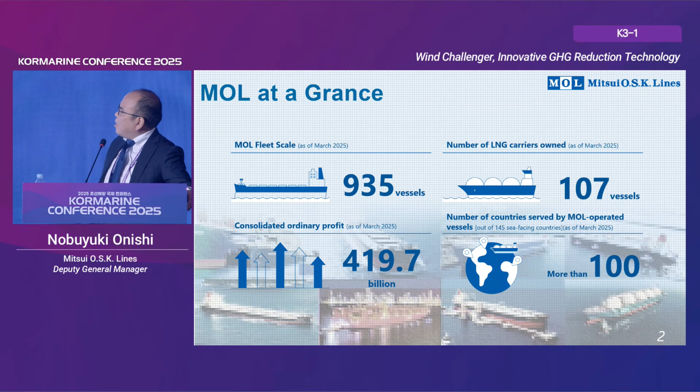Let me briefly explain our company. We are one of the biggest shipping companies in the world. Our fleet size is 935 vessels, including 107 LNG carriers. The LNG carrier fleet is one of the biggest at this moment. Our fleet portfolio is quite well balanced: one-third is bulk carrier, another third is energy sector, and the other third is other transportation sectors. So this is our company's brief explanation.

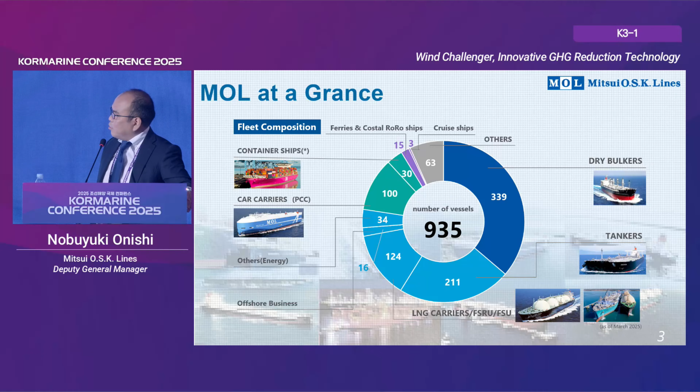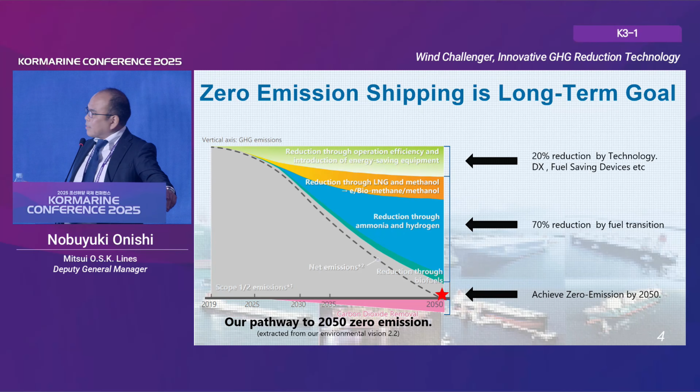Our target is zero emission achieved by 2050, same as almost all other companies. 70% reduction of the GHG will be by fuel transition. The other 20% is by technology, like DX or fuel saving devices, something like that. 20% of energy saving is huge. How should we do it?

The wind in the Korean language is pung. Is it correct pronunciation? Yep. The wind is the best candidate to assist ship propulsion with no emissions. There's the possibility to reduce fuel consumption dramatically. Dramatically meaning the underwater devices are already full capacity, very busy under the water. But above water, there's still a lot of room to improve the ship's efficiency. The wind is the best candidate.

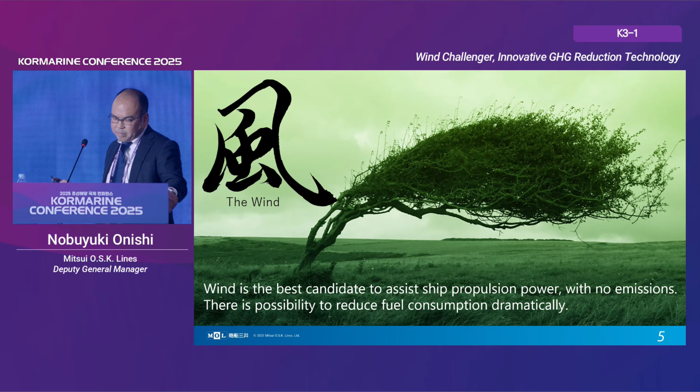We have a very long history getting familiar with the wind. We started the R&D of the Wind Challenger in 2009. We built the test facility in 2013. The first actual system on a vessel was in 2022, three years ago. Last year the second one was delivered. Next year, together with Hanwha Ocean, we will deliver two energy carriers with wind propulsion systems. Then we are going more forward.

The wind propulsion assist system is now a trend of the shipping industry. But not only a trend, it will be mainstream of the energy saving devices, because most underwater devices can only have one installed. But wind propulsion devices, we can put more if we have the space. The Wind Challenger is one of the leading group of the wind propulsion system, but other systems also will come up to the commercialized area. So now we have a lot of choices of wind propulsion systems.

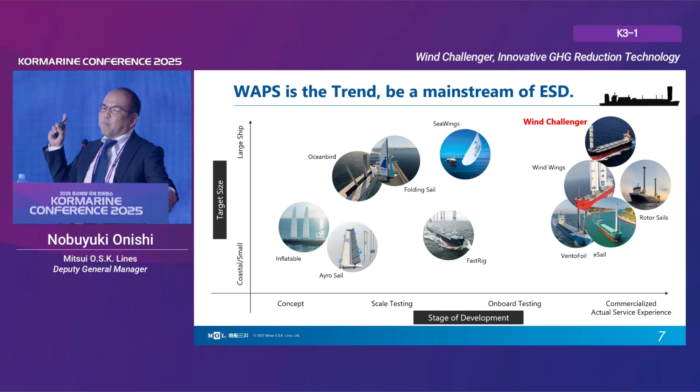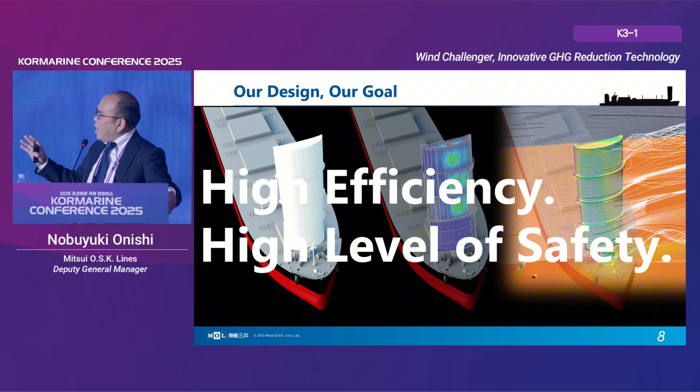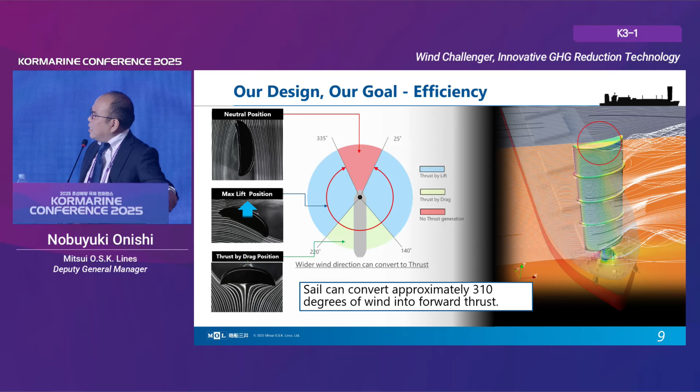The thrust generating mechanism is a little different depending on direction. The blue area is the side wind, where we use max lift for thrust. In the follow wind case, we use drag of the sail. By using this kind of thrust generation mechanism, we acquire a very wide effective area, effective direction of the wind.

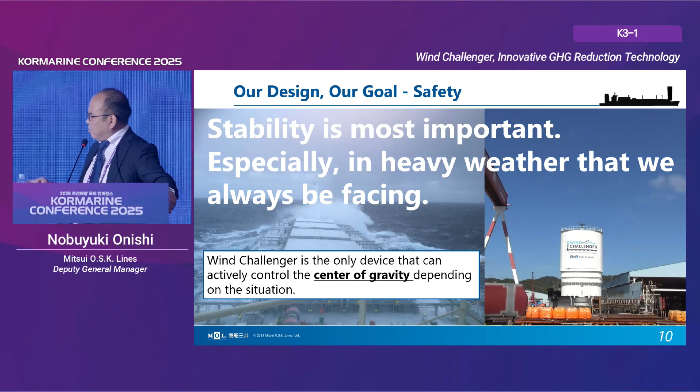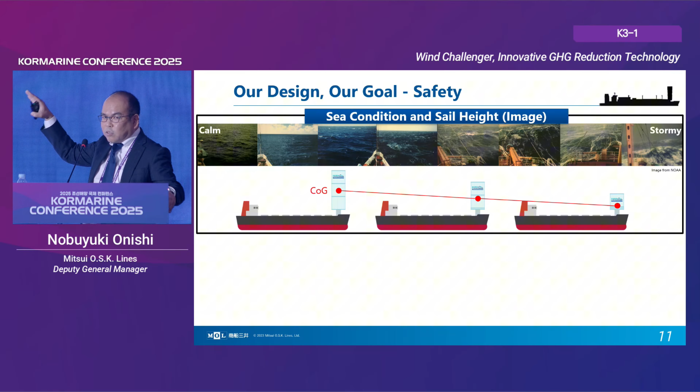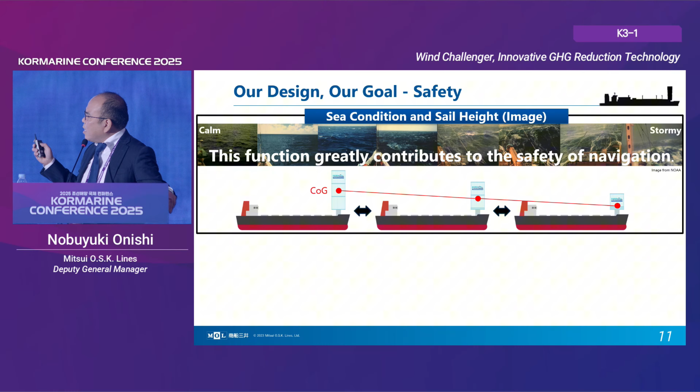This is the reason for the high safety of the wind propulsion system. Another unique point—this right-hand side shows the characteristic of the wind on our sail. We have the max lift point and also a zero lift point, which is kind of the neutral position. Our control system has a zero lift mode, meaning at zero lift angle, it automatically follows the wind. That function we can use for drifting, anchoring, and berthing to minimize the sail effect.

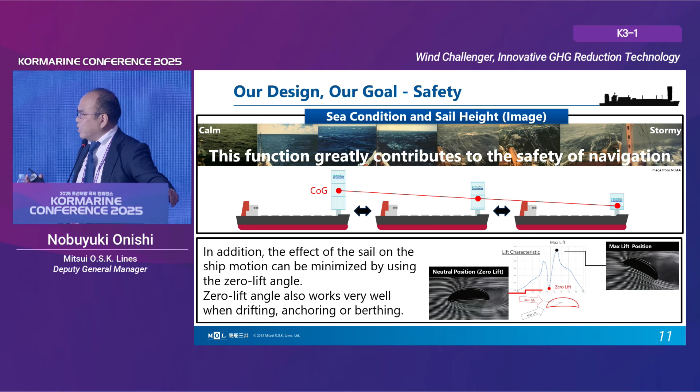This is also a very important function during berthing or other situations where we don't want to be affected by the wind. The mechanism is quite simple. We have a telescopic mechanism and a tilting mechanism. The telescopic mechanism is achieved by a rack and pinion system—quite simple but very robust. The tilting mechanism also uses gear and an electric motor. It's quite simple and very familiar technology. It's not new.

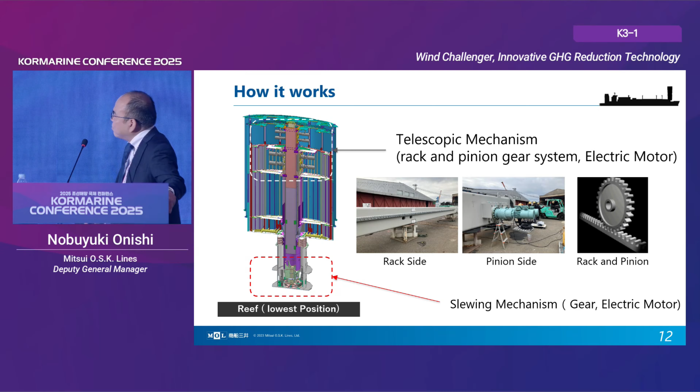The first stage motor pushes up the sail, and the second stage motor pushes up the first and second sail together. So this is the mechanism. Second stage motor is a little bit bigger than first stage. Actually, two motors are enough for lifting up, but we put four for redundancy.

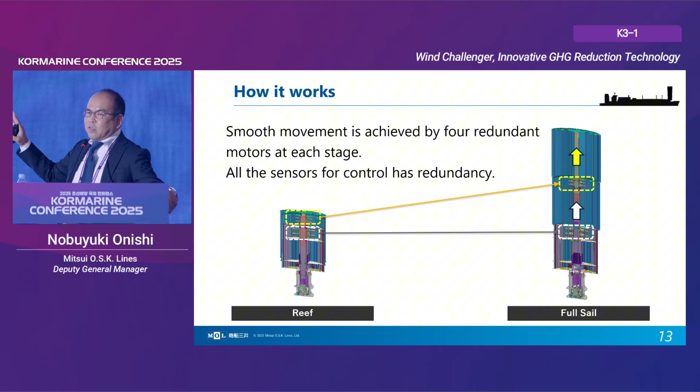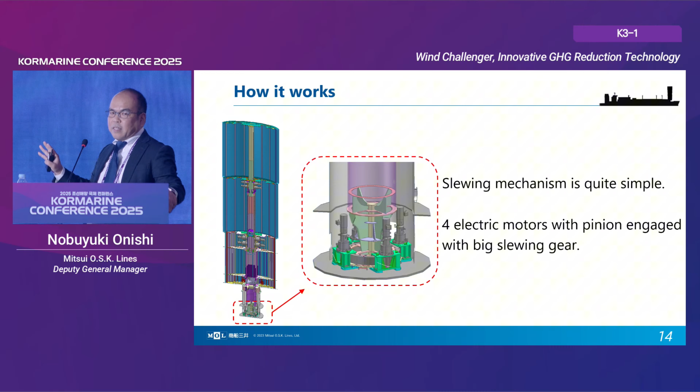The slewing mechanism is also the same. Four electric motors with pinions engage the big slewing gear. In most cases, two motors' power is enough, but we put four for redundancy. So in any case, we can use the sail.

Our development is not only the sail. We also develop the control system and weather routing system together. These three functions are very important for effective and safety operation. Later I will explain the weather routing system.

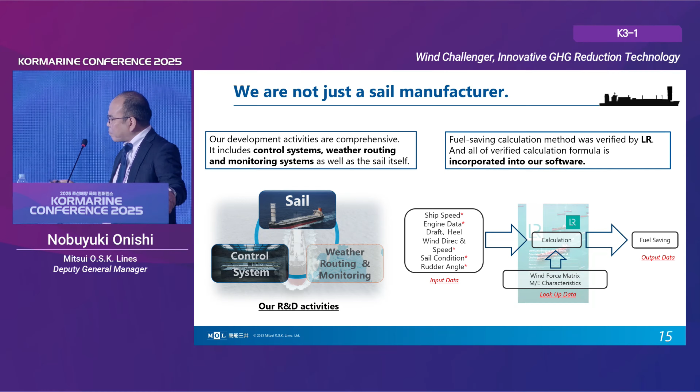In the future, maybe the saving amount can be traded, something like that. So third-party verification of the fuel saving amount is quite important, and we are already working with the Lloyd's Register on this.

The weather routing system is very powerful. Our original weather routing system has the motion model of the ship already integrated into the system. Normally, from Japan to North America, we use the Great Circle route, like that red line.

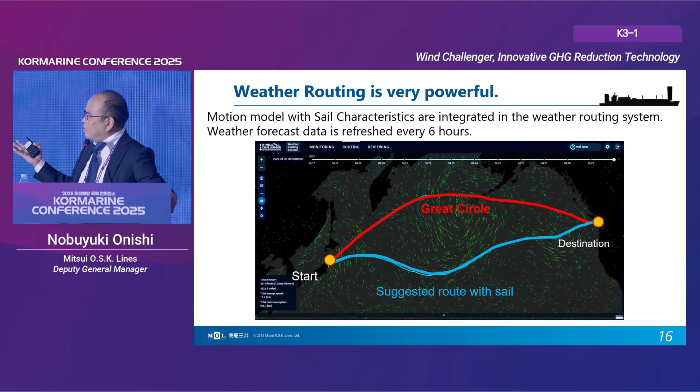But the weather routing system suggests a more effective route, depending on the characteristics of the wind propulsion system. So this is the wind challenger - it helps avoid headwind and get side wind or following wind.

This routing method is not based on our past experience. This route suggestion using the weather is most important for effective operation for the captain or ship's crew.

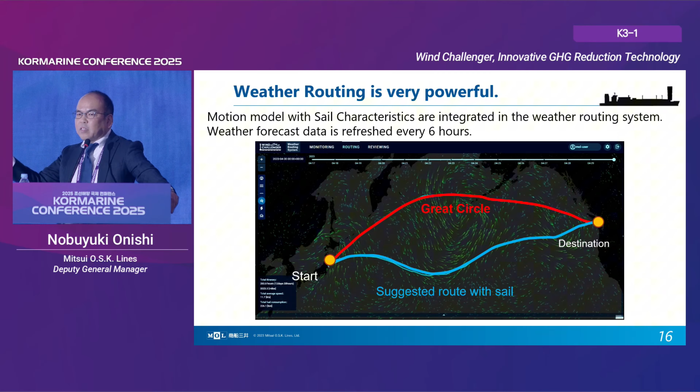As I explained before, we already work with Hanwha Ocean on a two-sail propulsion system that will be delivered to ship next year. Our activity is moving forward with other shipyards too. We are collaborating with all three Korean major shipyards - Hyundai Heavy Industry and Samsung Heavy Industry - and Hanwha Ocean is closest, delivering ships next year.

This is the new generation of LNG carrier designed to use wind power more deeply, accommodating multiple sails to clear the visibility problem. With two sails in the conventional LNG carrier, in the case of the wind challenger, two sails is the maximum to satisfy the SOLAS visibility regulation.

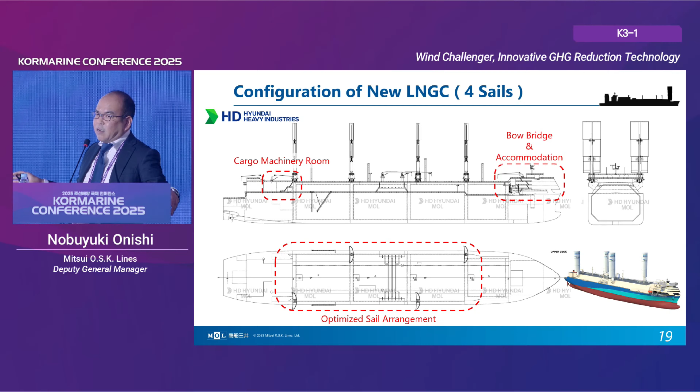But a forward bridge clears the visibility problem. The bow bridge and bow accommodation space results in space we have in the aft. So the cargo machinery room is put there, with a very fresh and wide area for the wind propulsion system on deck.

With Samsung Heavy Industry, this is also the same concept, but a little bit different. Only the bridge is put forward, and the aft is almost the same as conventional. So this is also good.

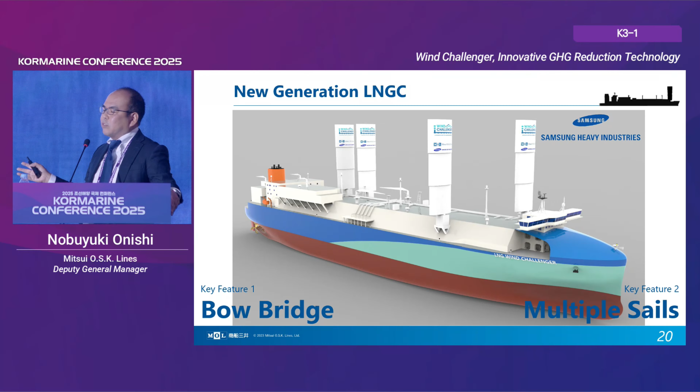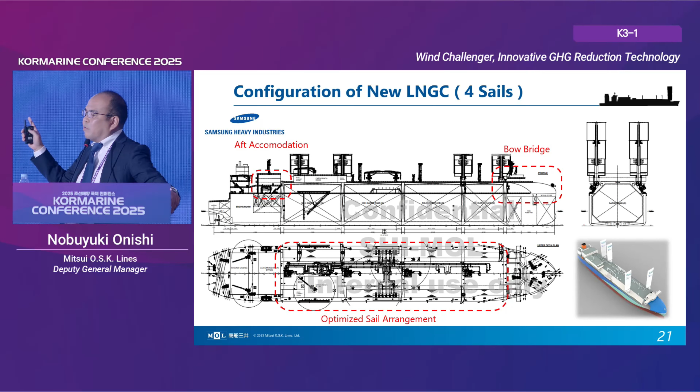The development activity term is very short because most of the area is the same as conventional designs, so this is also a good concept - bow bridge with still aft accommodation and optimized sail placement on the deck. This is also a very good concept.

This slide is most important. Four sails on the LNG carrier can save 15 to 20% on yearly average. So peak saving is more than 30%. This is our own simulation.

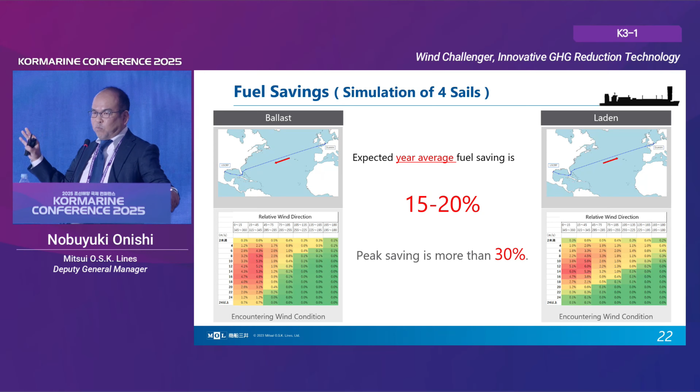So this kind of actual performance, we feed back into our simulation system.

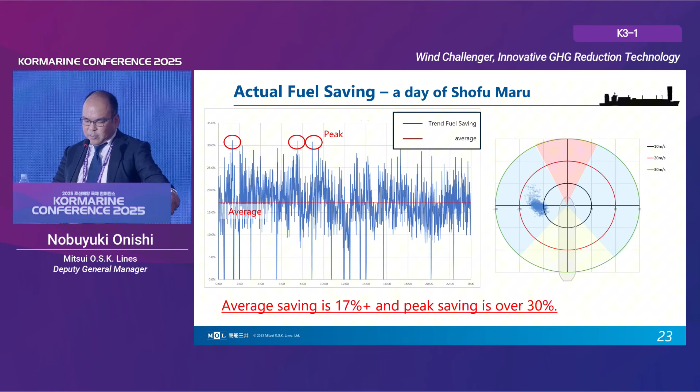For the next step, we need to increase production capacity to use more wind power. The sail - most are currently fabricated at Oshima Shipyard in Japan. Sails can be transported physically, but it's not easy.

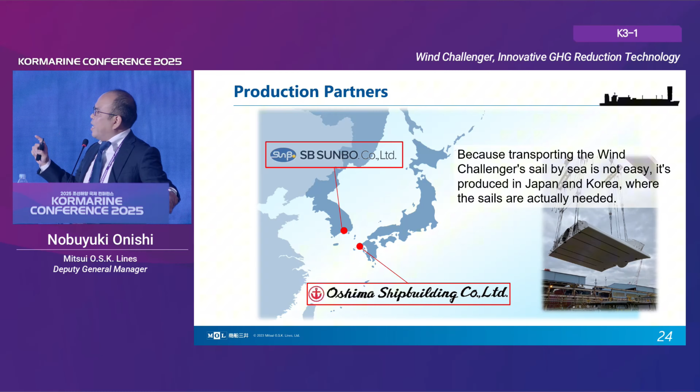So we found a Korean fabrication partner, a production partner - Sunbo Industry. Now we have two production bases, in Japan and Korea. We are planning to scale up production to meet increasing demand with our powerful partners, Oshima Shipyard and Sunbo Industries, SB Sunbo.

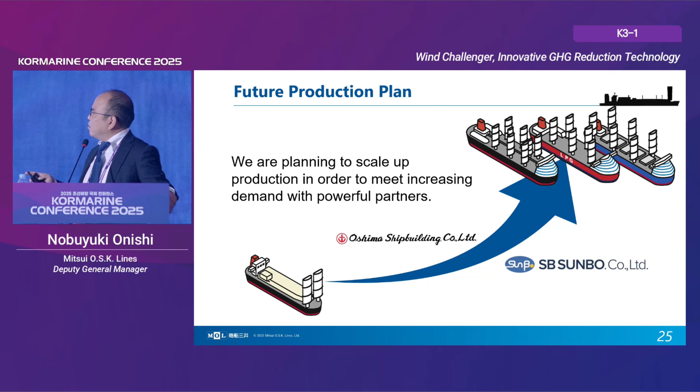So we're moving forward with innovative ideas. May the wind force be with you. Thank you very much.